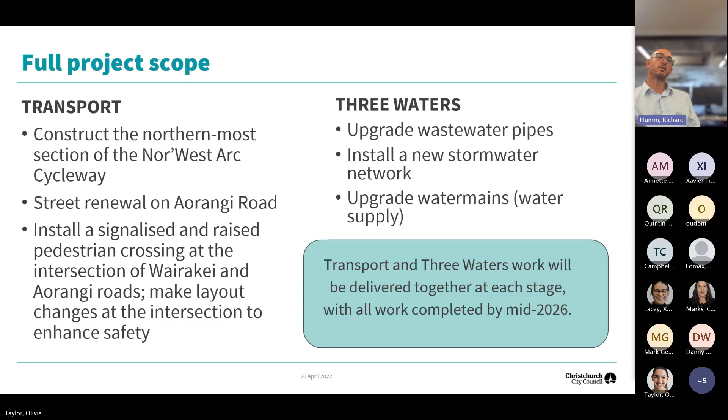The route begins at the Princess Margaret Hospital in Cashmere and currently open as far as Jellie Park Sports Centre on Ilam Road. The cycleway will provide a safer route for cyclists to get to school, university, work, pools, gym,

parks, local shops, making it way safer for people to bike, help reduce congestion and lowers emissions, makes it a lot easier to get around.

After the cycleway works is completed, there is only one small section remaining of the Nor'West Arc, which is the Annex Road rail crossing. We're currently working with KiwiRail just to confirm the programs on that, and we'll be looking to complete that sometime in the future.

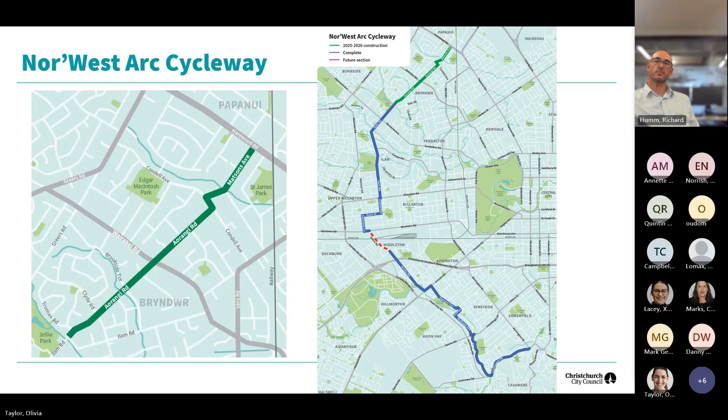And again, all stages are to be completed in mid-2026.

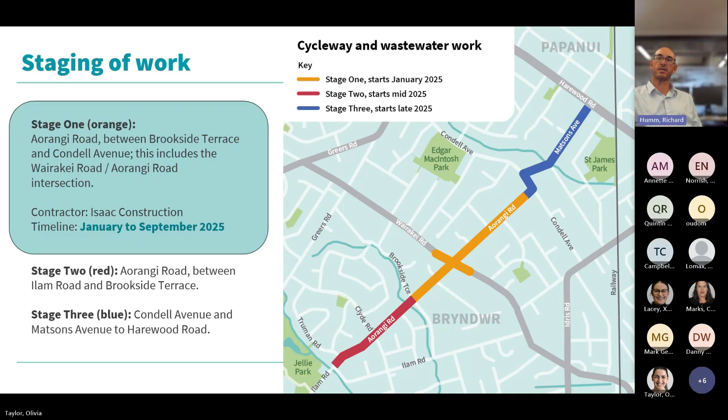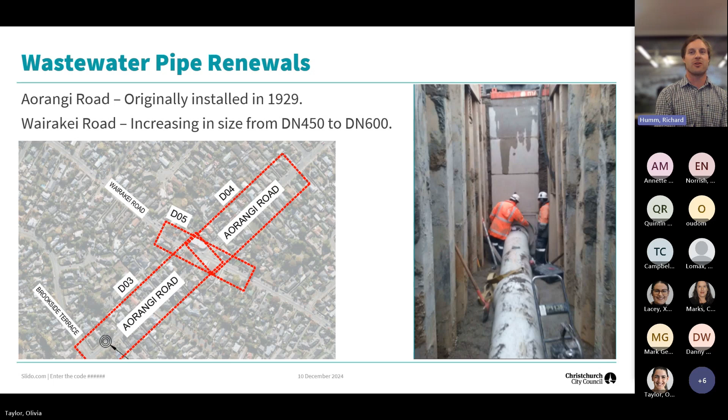The pipes on Wairakei Road are quite a large diameter trunk main which runs down Wairakei Road. It takes a lot of wastewater flow from that northwest part of Christchurch, and it also needs to be upsized. It's currently running full, and it's going to be upsized from a DN 450 to a DN 600 at the same time. There's also some other works on water supply pipes and wastewater pipes in other parts of the project, but probably the most significant works will be around this Aorangi Wairakei Road intersection with the wastewater.

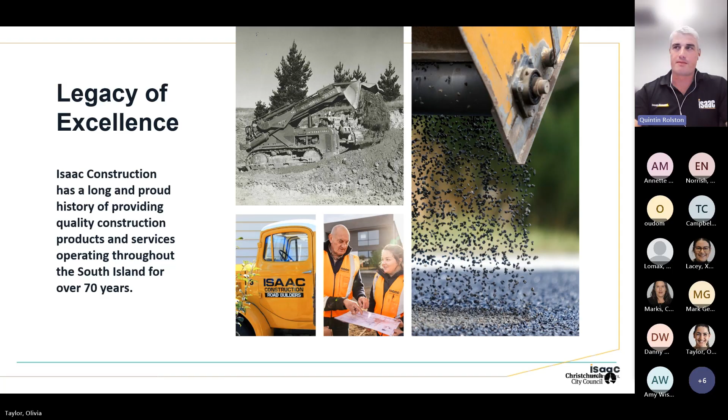The Isaac Conservation and Wildlife Trust has some pretty key goals that they work towards. One is completion of the Isaac Conservation Park, the reclamation of quarry land for the creation of wildlife habitats, breeding of endangered endemic bird, reptile and plant species, and promoting public support and interest for conservation and preservation programs and education. I'll talk about each of those.

We've got about 1,100 hectares of land directly out behind the Christchurch Airport, just off McLean's Ilam Road, and we've repurposed 85 hectares at this stage into essentially a conservation park. It's rehabilitated quarry land, wetlands and breeding facilities where we breed our endangered bird species in partnership with the Department of Conservation, for fauna conservation, our specialised breeding program.

We're currently breeding orange-fronted parakeet, NZ shore plover, black stilt, brown teal and the blue duck. Some of these birds would be extinct if it wasn't for the Isaac Trust's intervention over the last couple of decades. So it's pretty important work.

Flora conservation, so native revegetation, regeneration, eco-restoration projects. We've had a large project planting about 90,000 plant species, trees, etc. along the Otakaikino waterway, which runs through part of our property, and we target regeneration and revegetation projects right across the South Island.

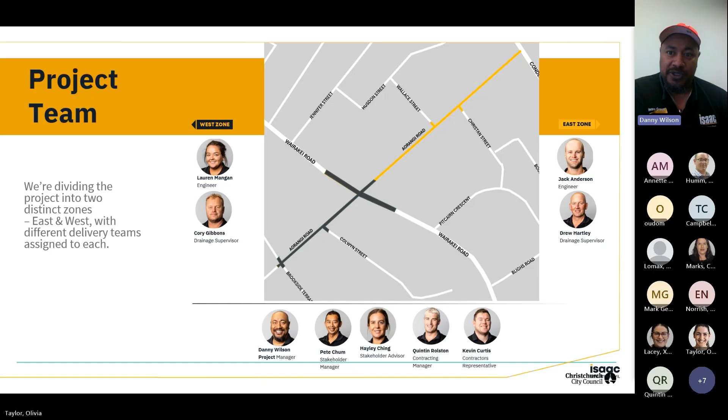And if you see any of these people out on site, feel free to come and say hi or ask them a question about how the work's progressing.

In terms of sequencing, our first phase is going to be the Wairakei Aorangi intersection, and that's mainly based on the sewer renewal that we have to do. So what we have to do first is get in and replace the old wastewater network, which Ross had talked about earlier. What that involves is digging a 4-metre deep hole, essentially pulling out the existing pipe and then putting the new pipe in again. So to enable that, we'll be doing some sheet piling, which I'll go into in a bit more detail next, and then we'll have diggers and things on site to dig the holes.

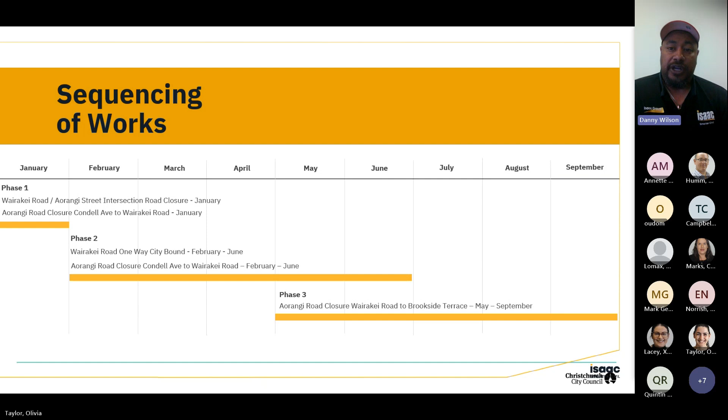So that'll be the first phase, which will start in January. The second phase, which will go from February through to June, we'll continue the installation through the intersection, plus we'll be working in a section on Aorangi as well. And then through the third phase of works, we'll be looking to open up the intersection, have all the drainage work done, get the intersection traffic signals in, redo the road, and then work on a section from Brookside through to Wairakei intersection.

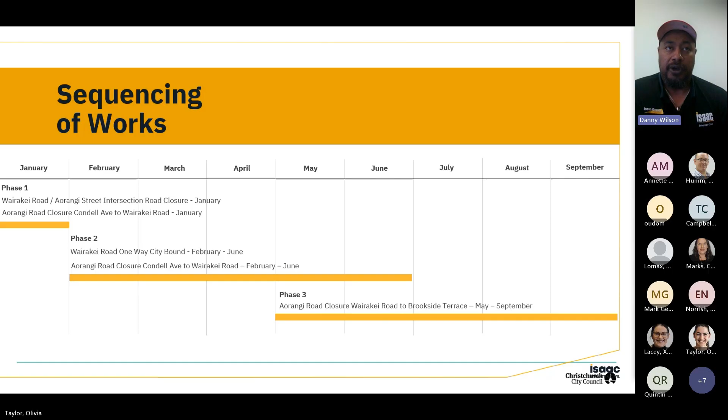So for our traffic management, for our first phase, we will have the Wairakei Road Aorangi intersection closed. That'll be 3 weeks in the January period, which will get us essentially through to February from the start of the year. The second phase, from February through to June, we'll open 1 lane on Wairakei Road. So we'll have traffic able to flow through to the city, and we'll have detour maps that will tell you how to get in and around the work site.

North of the intersection from Aorangi to Condell, we'll have traffic flowing from Condell Ave through to Wairakei, and that'll allow residents to get into site and into their homes that way, and they'll be able to exit onto Wairakei and head towards town.

For phase 3, we are hoping that all that will be open, and you'll have traffic as usual through there, and we'll run a one-way section between Brookside and Wairakei, and that will help us complete the works down in that section.

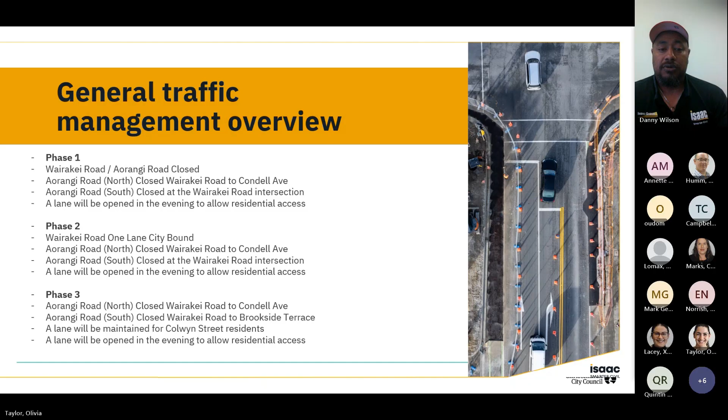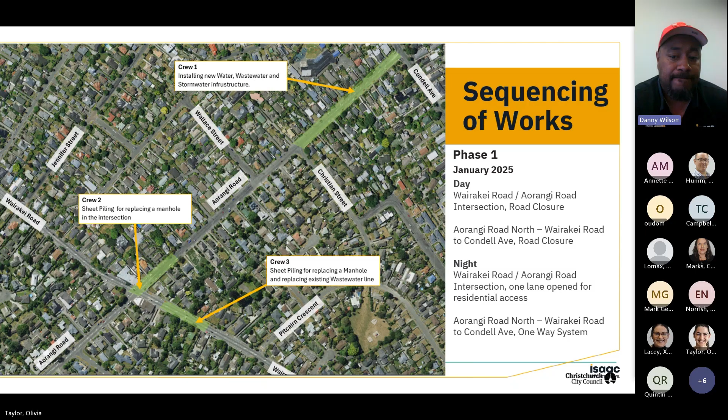I'll go into the sheet piling because this is a major part of our works and what we need to do to keep our guys safe while we install the 4-meter deep pipes. Essentially with sheet piling, we have a big digger on site, and it'll lift some steel sheets which are 9 meters long, lift those into the air and drive them into the ground. That creates a water barrier and a safe zone so that the ground around the excavation doesn't close in and fall on our guys.

It's quite noisy, and there is vibration that will be felt by nearby properties. But we will only be doing this work during the day, and we'll have noise monitoring machines there, and we'll be keeping an eye on the vibration as well.

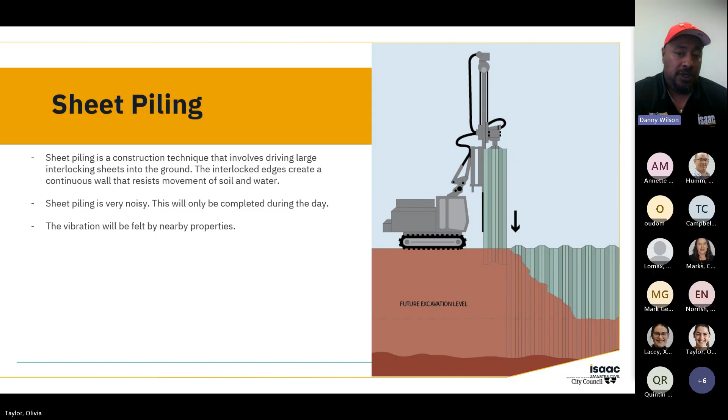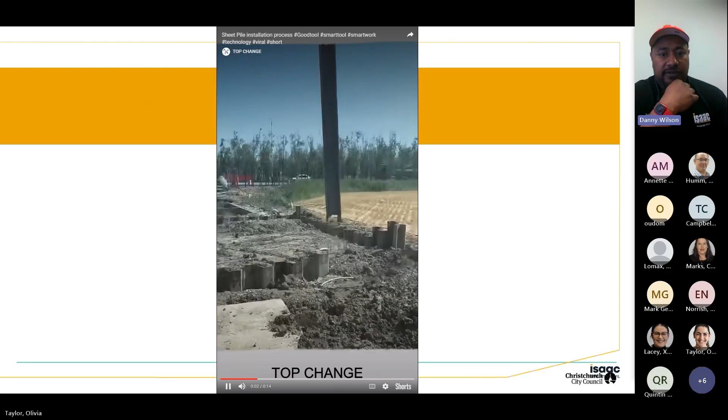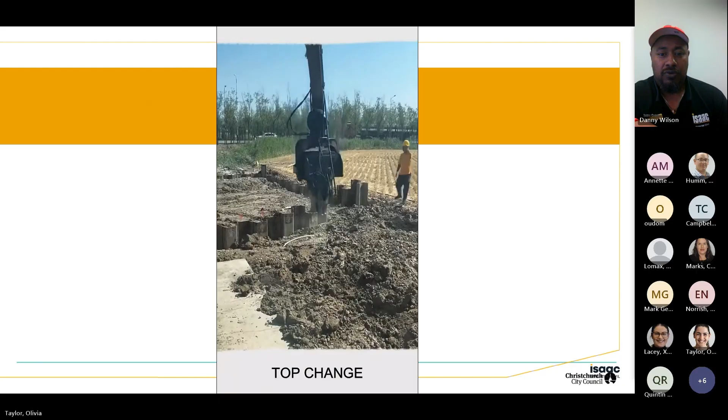On the next slide, I thought we'll just add in a little piece, a video from YouTube, just to show you what it actually looks like - the excavator lifting up the sheets, and then they're vibrated and driven into the ground.

During this time, we understand there is going to be a massive disruption to the businesses, and we're here to try and work in with you and help do what we can. We can adjust how we program works and how we fit parking in.

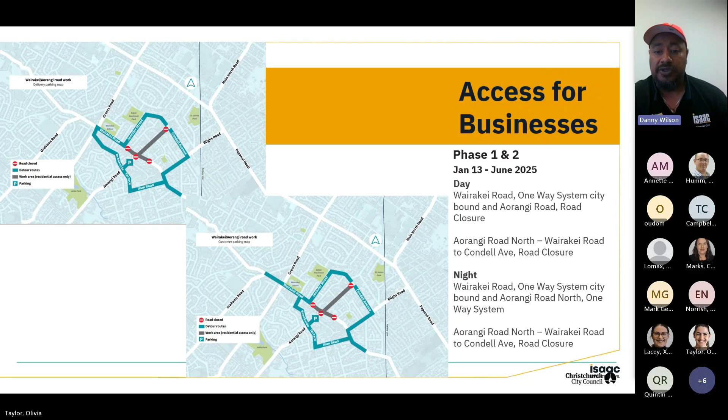Following on from that first phase, where we have the intersection closure, this is what it will essentially look like from February to around June. We'll have a single lane open down Wairakei, letting people head into town, with detours in place to get you out and around the current worksite.

That section of Aorangi, we will have access for residents from the Condell end, and you can go in there and then exit at the Wairakei end. That's going to be the major setup, and we'll be sending out communications about that, and I'll get Pete to talk to that a bit later on.

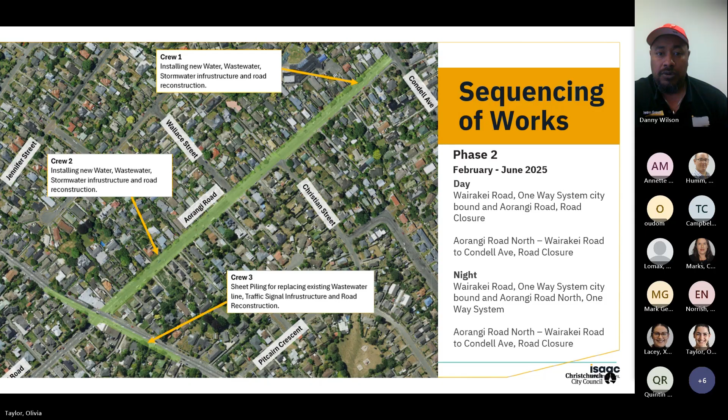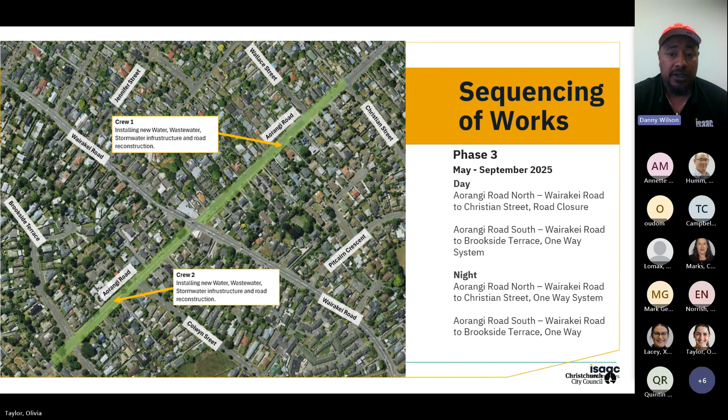For the final sequencing, we're still working through the finer details. We have a work area on the north side of Wairakei, which is for if we need extra time and the weather's poor - we'll still be working in that area to redo the road while we open up the area south to start service installations, then carry on and build the cycleway and the road last. That's the very last stage, taking us through to September 2025.

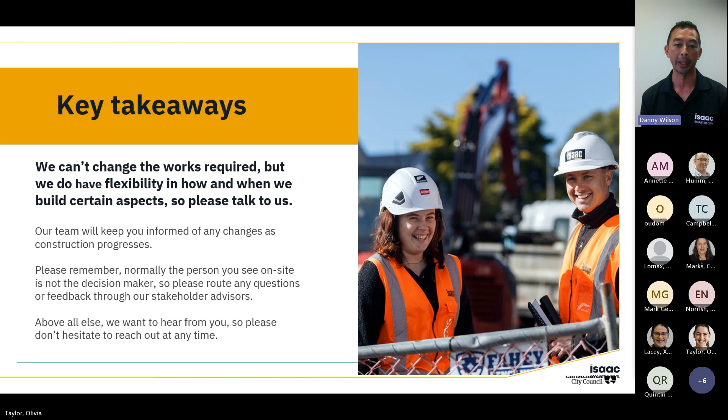And just remember, in particular, that our teams on the ground aren't really the guys that make the decisions on the project. Make sure that you raise all concerns and queries through our stakeholder advisor. You'll have the contact details through our communication that will go out next week. So yeah, get in touch with us.

Thanks, Pete. So we've already got a few questions here from some of the people that have been on there. We got one from Annette about the access to her site. As Pete mentioned, there'll be some communications coming out in the next week or so that will detail that a bit more. And Annette, please make sure that you get in contact with Pete and his team so that they can make sure that you have access to your site and make sure that everything works for you on that.